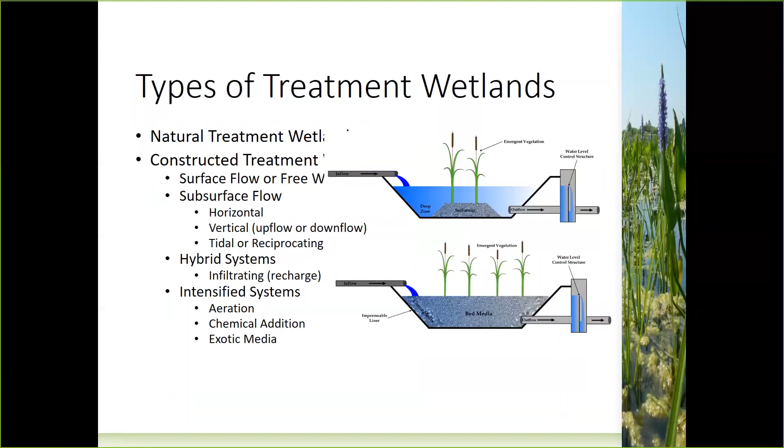There are other chemical supplements that are sometimes added that maybe make up for trace nutrients or elements that are missing that can enhance some of the processes. Various types of media can be used to provide additional adsorption surfaces. So there's a whole range of different types of projects out there.

When we get into Florida in particular and start to look at what's been done, they really fall into these 2 categories. There are a dozen or so natural treatment wetland system projects where existing hardwood wetland communities that maybe have had some kind of hydrologic degradation over time could use supplemental water, have been used as a way to further polish municipal wastewaters or, in some cases, treat stormwater.

Most of the constructed wetland projects in Florida, and this certainly represents the STAs that the South Florida Water Management District has constructed south of the lake, are these constructed surface flow marshes. Within those marshes, which make up most of the types of systems that have been constructed in Florida, we talk about different plant communities. You've heard reference to most of these today.

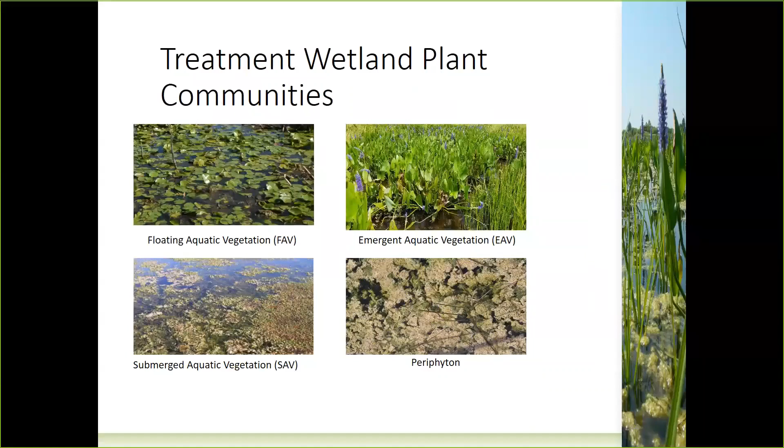Floating aquatic vegetation there in the top left. Emergent aquatic plants, these are the typical marsh plants you see in roadside ditches and retention areas. Submerged aquatic vegetation, we heard Cassandra mention coontail and the naiad and some of the species that were in the mesocosm study. And then the periphyton, which is more of a calcareous algal community that has a real affinity for binding up phosphorus in the water and tying that up in insoluble calcium phosphate compounds.

While most of these pictures of these systems, these nice pretty green things with plants and water, maybe don't look like an engineered system, the reality is that the ones that are designed well and operate the best truly are engineered treatment systems. There's every bit as much science and engineering fundamentals behind their design as there would be in a conventional wastewater treatment plant or a highway or bridge project. So don't let their beauty fool you.

I will not go through this in detail and give you a quiz at the end of the presentation.

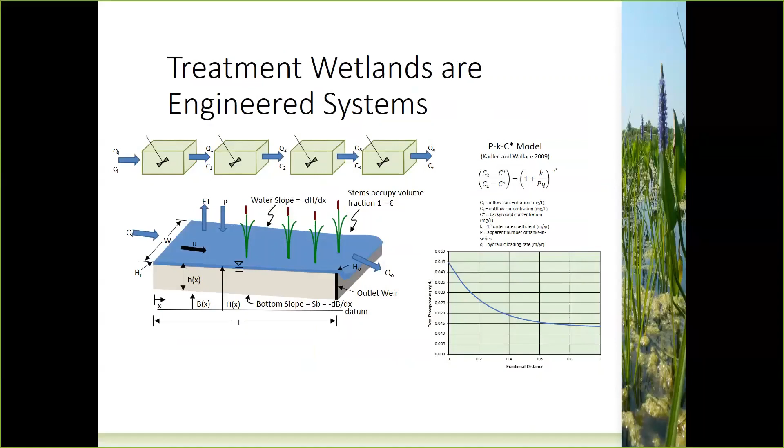With that said, these have been used across the United States and Florida for about the last 40 to 50 years, with some very pioneering work done out of the University of Florida that began in the late 70s, early 80s. Parallel efforts looked at cypress swamps in Florida and constructed or natural marshes in Michigan to accept, in most cases, municipal wastewater effluents, polish those nutrients out, reduce the organic loads, as well as provide other water quality benefits.

There are photolytic reactions driven by solar energy inputs that can break up different types of compounds in the water. There's adsorption to sediment surfaces, new detrital surfaces, biofilms that cover the plant stems and the bottom of the wetland. There's uptake by the vegetation and the bacterial and microbial populations within the wetland. There are biodegradation, transformational type processes as water moves through the wetland.

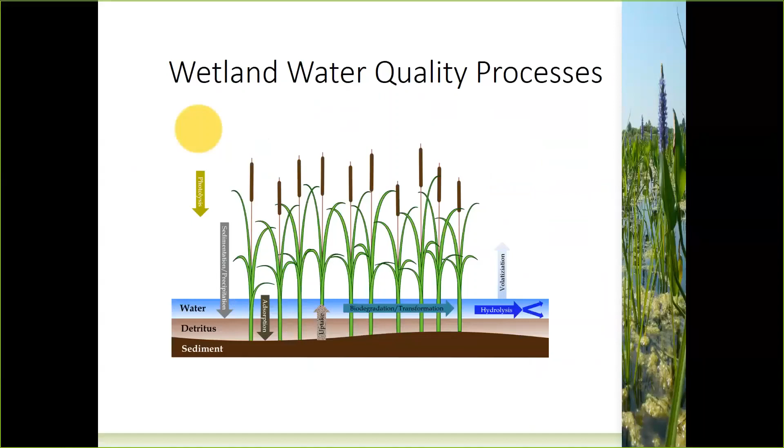Similar with total suspended solids, whether they're algal-based solids or some other form of solids, removal in wetlands is typically good for those when they're well vegetated and operated well. The focus here has been on nitrogen and also on phosphorus in South Florida. We see that nitrogen removal in wetlands can get to 1 milligram per liter, and I'm going to show you 3 projects where those types of levels have been achieved.

The inorganic nitrogen that we've heard quite a bit about already today, the ammonia and the nitrate components, are virtually eliminated in most treatment wetland systems. The natural background concentration for those particular forms of nitrogen is effectively 0. So we can very often, particularly in the summer, when kinetics are maximized at higher water temperatures, get right down to analytical detection limits for the inorganic nitrogen parameters.

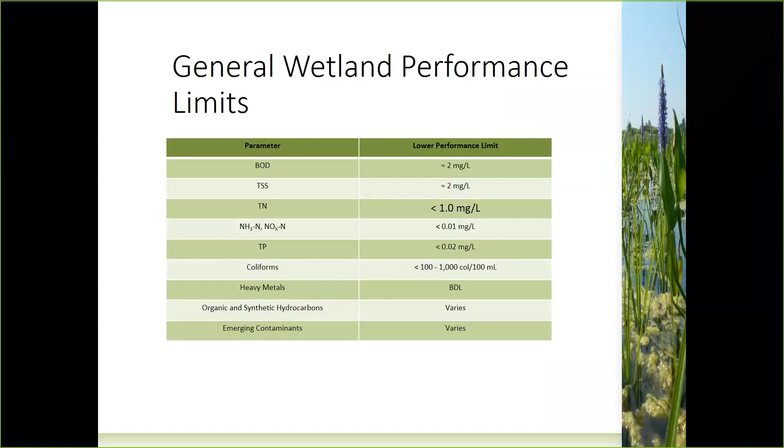Similarly, there are multiple pathways for removal of heavy metals, organic and synthetic hydrocarbons, and a wide variety of emerging contaminants that are starting to break into the news now. We hear about endocrine disrupting chemicals and personal care products and pharmaceuticals, sucralose, those types of things that come out with the waste that leaves our homes and goes through wastewater treatment processes and isn't completely removed in conventional treatment systems. Some of those parameters are very effectively removed in a polishing type wetland system.

There are processes available there that mineralize organic nitrogen to ammonia. There are nitrifying bacteria in there that will take ammonia and convert it to nitrate. And what's really beneficial in wetlands, as you heard Cassandra speak about just before the break, is the denitrification process. Wetlands at their sediment interface are very anaerobic typically. It's a low oxygen environment.

There's dissolved organic carbon that's provided by the vegetation in the system. There are biofilms or slimes that are full of microorganisms that cover all the plant stems and the entire bottom of the wetland. And you put those three things together and you get very good removal of nitrogen through denitrification, leaving the water column and gassing off to the atmosphere.

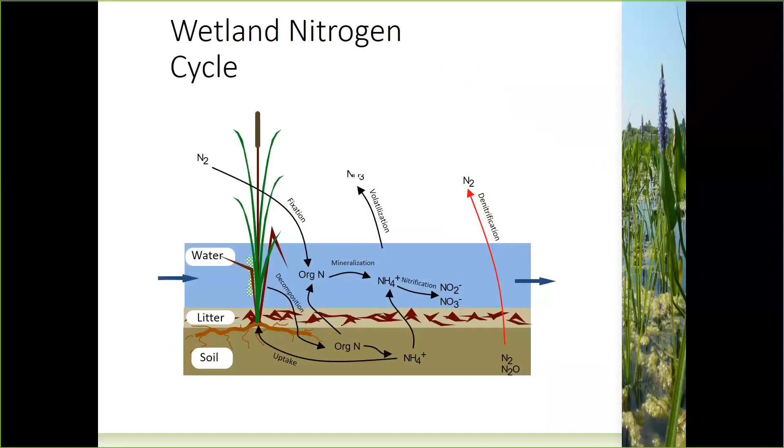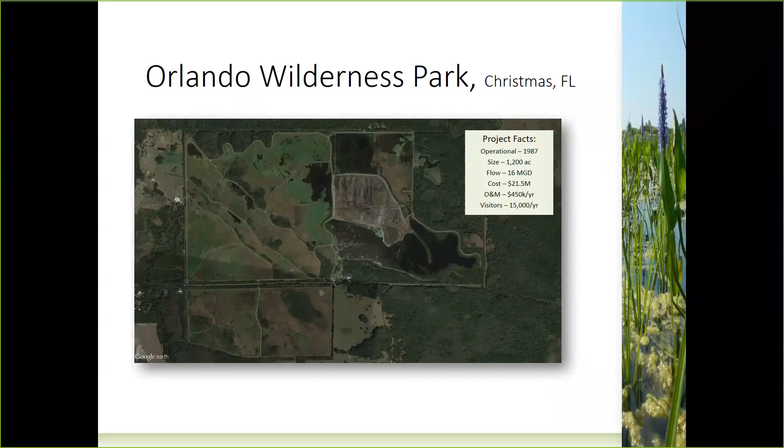Three projects I'm going to highlight now that treat different types of water across the state of Florida, but have all shown a similar ability to get to very low nitrogen levels. First one is Wilderness Park, which is just east of the city of Orlando in a, strangely for Florida, named town of Christmas. It's been in operation since 1987, and it treats advanced wastewater from the city of Orlando's Iron Bridge Water Reclamation Facility. It treats a flow of about 16 million gallons a day. It's 1,200 acres in size.

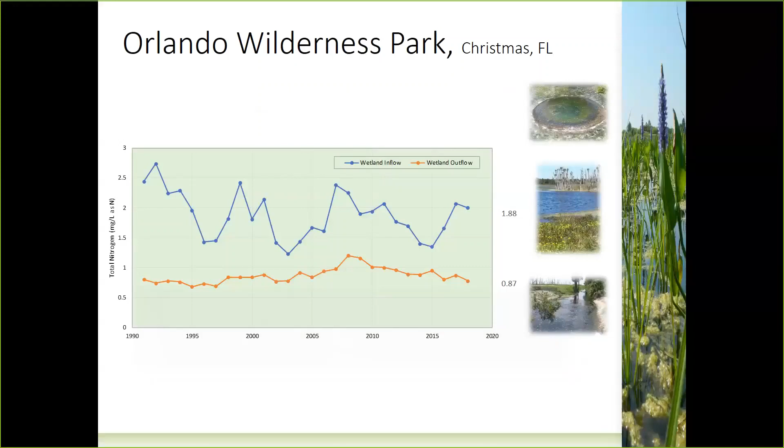So we see that over this long operational history, the inflow nitrogen for this facility has averaged 1.88 milligrams per liter, and the outflow has been well under 1 at 0.87. Again, this is one that treats all municipal advanced treated wastewater. This next project is located in Gainesville. It's called the Sweetwater Wetlands Park.

This one treats combined flows of treated municipal wastewater, reclaimed water, as well as watershed runoff from a several thousand acre urban watershed. So both those sources of water commingle and come into this project and are treated.

Any Gator fans that might be sitting in the audience can look very closely at this picture and you might see something recognizable there. I'll point it out in great detail.

But here's the operational data. This project's been up and running since the middle of 2015. So it's a relatively new project compared to Orlando, but the performance for nitrogen has been relatively similar. The inflow concentrations have been a little higher coming in here. This wastewater from this facility isn't treated to as high a level as the Orlando system. There's a little bit more nitrate coming in with this system.

But as you see, because you've got that denitrification process, it works so well in wetlands, we don't have any problem getting this system down to about that 1 milligram per liter mark for total nitrogen leaving and going to the receiving system.

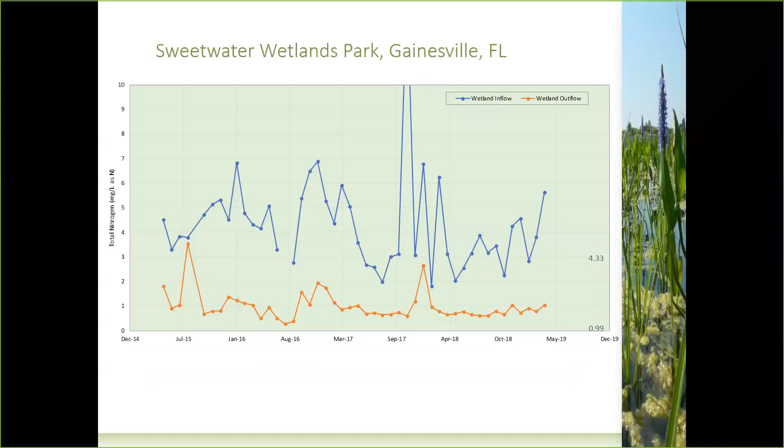The last project is one that's a little closer to where we are now. This is Freedom Park in Naples, which treats purely runoff. This is not a reclaimed water project or a reclaimed and stormwater combined project. This one's all watershed runoff. It's capturing the water from about a 3,000 acre watershed and treats about 200 million gallons per year of flow and reduces those concentrations in that nitrogen by about 41%.

We look at their operational data here. You see that the nitrogen concentrations here are a lot more similar to what we see in the Caloosahatchee River, the C-43 Canal, kind of averaging there around 1.5 milligrams per liter, which is kind of in the range of what the inflow concentrations were like in the Mesocosm project that Cassandra spoke about.

And we see that this treatment wetland system is similarly capable of getting those nitrogen concentrations down below a milligram per liter. So again, this is because all the inorganic nitrogen basically is being removed, and those little bits of available organic nitrogen that are being produced in the system, as Cassandra showed, are also being consumed and reduced.

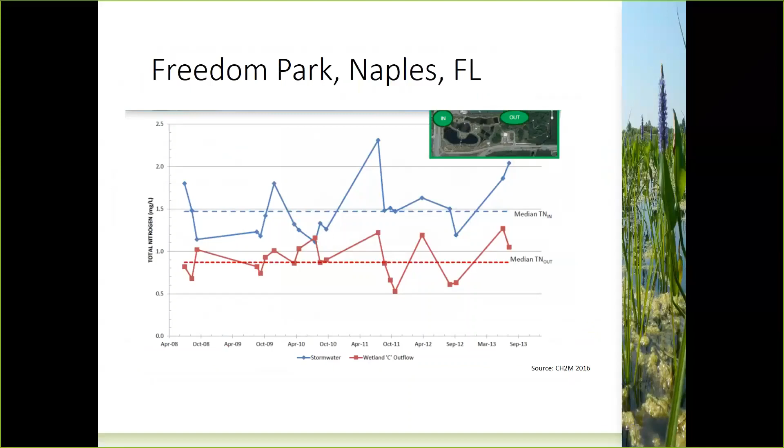As part of some previous projects for the water management district, we looked at performance from a range of systems across the state, evaluated those data based on vegetation type and soil type and started to see if there were any differences there. And what was interesting for nitrogen, and this was borne out again in the mesocosm project that we just heard about, was that there wasn't a very clear difference in performance across vegetation type for total nitrogen.

The same is not true for phosphorus. The submerged aquatic plant periphyton community showed a much better removal efficiency for phosphorus as a function of vegetation type. So there's some differences there depending on what parameters you're really interested in improving.

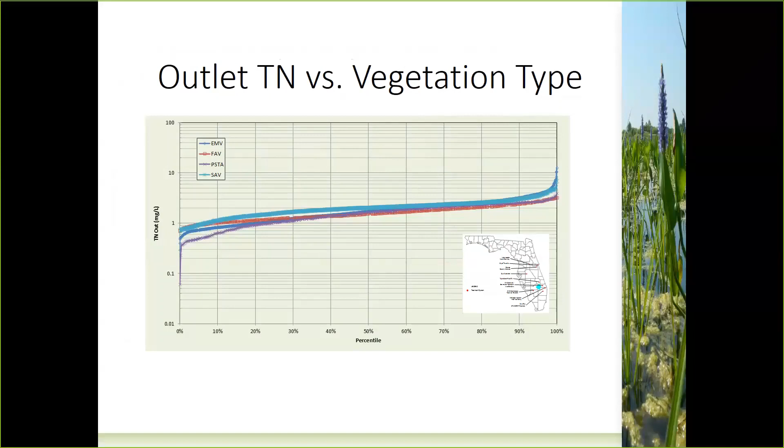However, when we look at it based on sediment type, we found some very interesting differences relative to total nitrogen removal. We grouped these based on the natural substrates that were there for those treatment wetland systems, whether they were clay, peaty organic soils, sand, or lime rock. And what we found was that the sandy mineral soils consistently produced the lowest nitrogen concentrations.

That is why this kind of spiraled into the work that Cassandra talked about, why the soils that were put into those mesocosm tanks were sandy soils from that site, and why we went to the next step of looking at any labile nutrients that were there and doing the acid and peroxide rinses to liberate those and be able to really compare that difference. But kind of across the board, and this is consistent with the Freedom Park project, the Orlando project, and to some degree the Sweetwater project, they're all constructed on mineral soils.

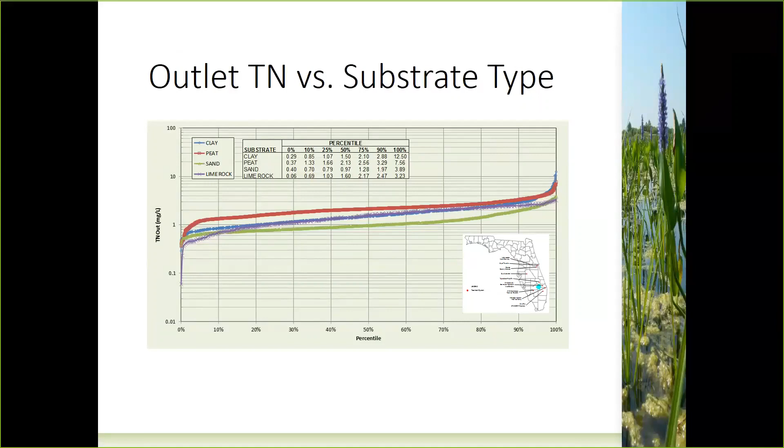So finally, some keys to maximizing wetland performance. Again, this kind of goes back to this concept that you've got this nice pretty green blob with plants growing in it, and wow, it looks great. They can be designed well and they can be designed poorly. So it's very important to understand the system goals.

There are differences in how you approach a design and how you approach operation, whether you're concerned with load reduction or concentration minimization. There are big differences between the STAs that are south of Lake Okeechobee that are trying to minimize the outflow phosphorus concentration versus the couple of STAs that have been constructed on tributary inflows to Lake Okeechobee, such as the Taylor Creek STA, that is focused on load reduction. They operate at different efficiencies and with somewhat different purposes. So it's important to understand at the outset of a project what's the goal, so that you can approach the design in the right way.

As we just saw on the previous slide, selecting the right site. The soils matter. If you want to absolutely minimize nitrogen concentrations, probably don't go build an STA or another type of treatment wetland system on a peaty organic field. Choose a better place for it.

Maximizing hydraulic efficiency. This is that whole green blob thing. You can have something that looks like it's unorganized and maybe just this green space, but if you really want to maximize the water quality performance benefits out of that area, the grading design is important. The location of inlet and outlet structures, the internal flow redistribution is important. How it's analyzed, how the cell geometry is laid, and how that relates to velocity and depth control and a whole variety of other issues.

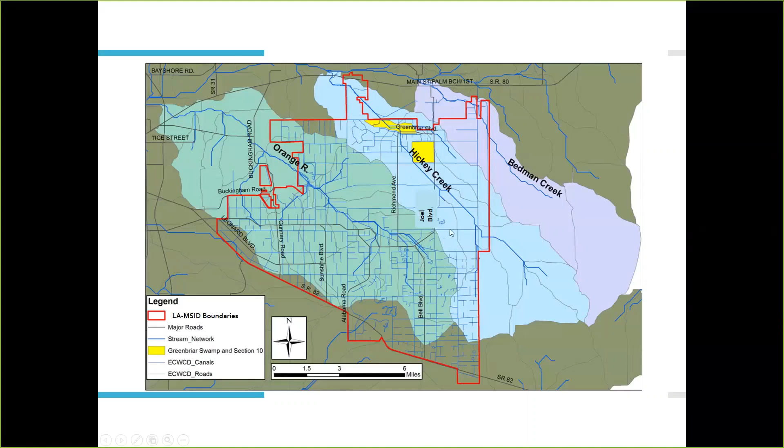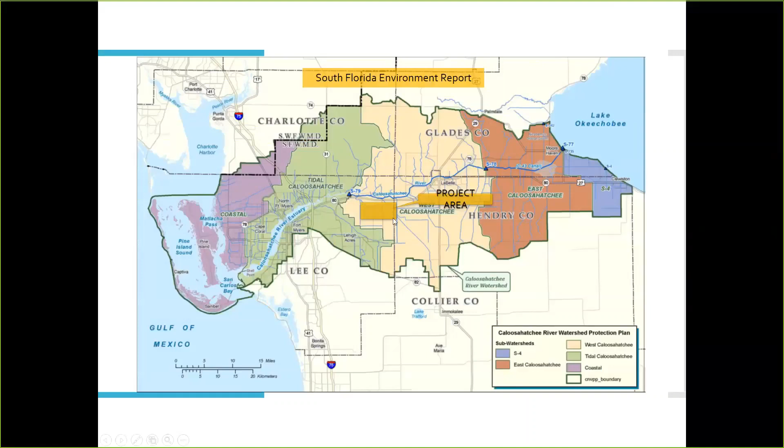And we've seen this picture today where the project area is. You can see our project area that we're going to look at today is about in the center in that area. This is our district. It's 110 square miles. It has 311 miles of canals, 20 lakes, culvert crossings. We have quite a few weather stations, 31 weather stations. We have 109 water control structures, and 64 of them are automated, so we can control where our water goes pretty good.

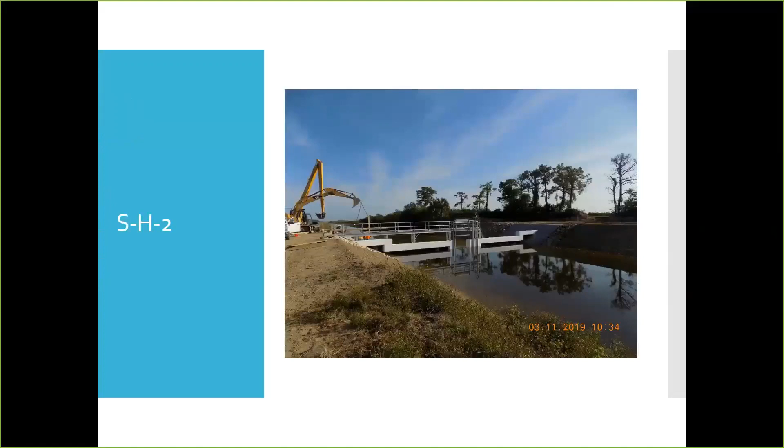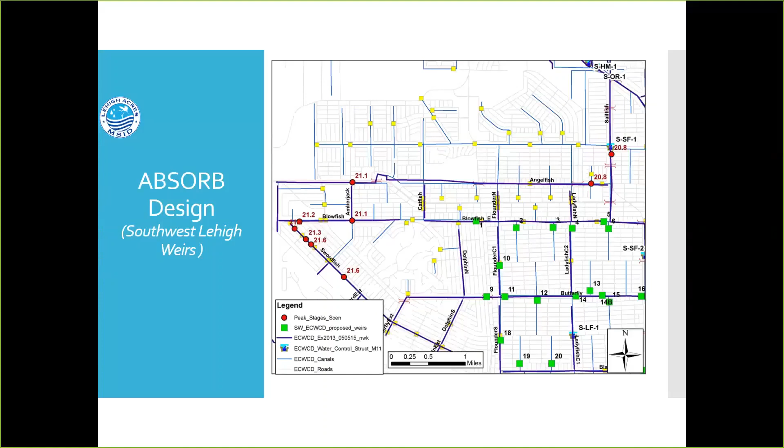The Absorb project we finished in 2018, that added 25 water control structures in southwest Lehigh Acres, being able to raise water levels, hold back, isolate water from the Caloosahatchee up to 3 or 4 feet in a 10 square mile area. There's some pictures of construction.

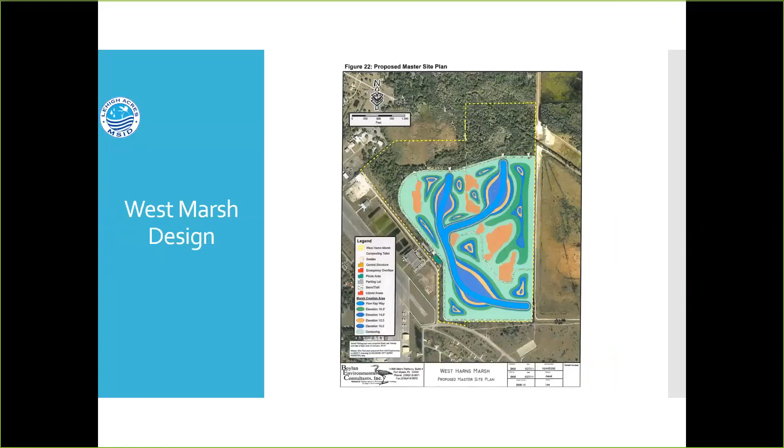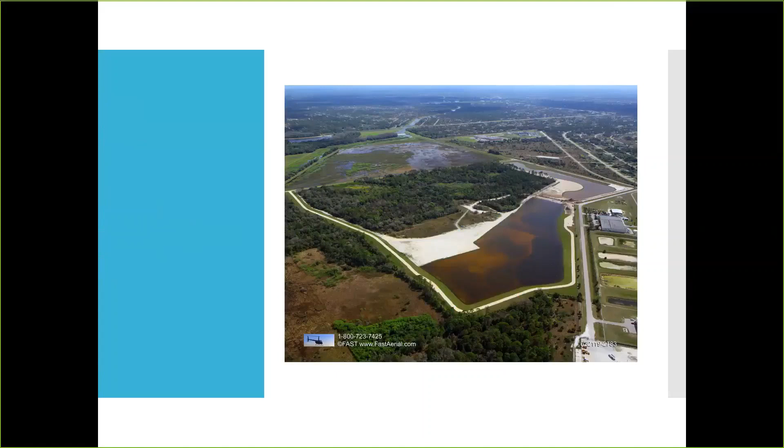This is the conceptual plan that was drawn by Boylan Environmental Consultants, and we are about halfway through the excavation of this project. So there'll be some deep lakes. We're restoring. We're leaving the wetlands actually in place and creating filter marshes throughout the rest of the project. All of this dirt is being moved down to State Road 82 widening project.

Crest, I just mentioned before that we moved a structure 1,000 feet south. The structure was moved down here by this Crest project, this little square right here. That's a 205 acre parcel that we have purchased recently. That's a picture from a drone. This is the conceptual plan right now from our engineers.

We'll bring water in off Hendry Canal to deep lake storage through a filter marsh, and then into deep lake storage again, and it'll outfall back into the Hendry Canal. That will be a treatment process that will be going on all summer long until we get a heavy event.

We'll be pulling water in a heavy event out of Dog Canal, which is a half mile away from our Hendry Canal, filling up our storage and then conveying water from Dog Canal to Hendry Canal to help some flooding issues that we also have in big events.

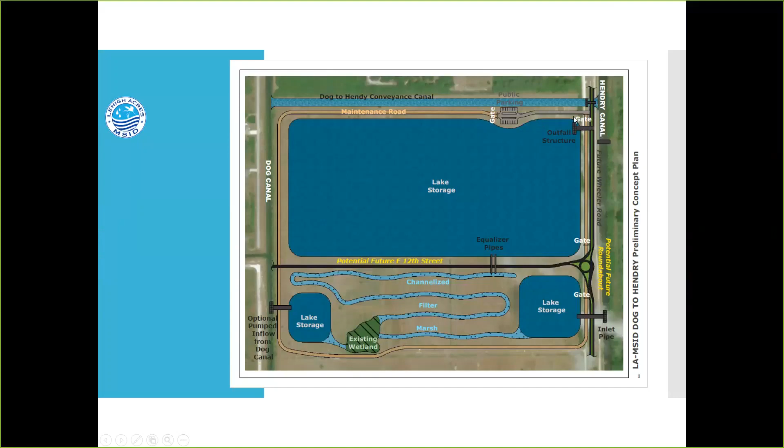Hendry Canal widening, we're widening 3.5 miles of our canal from 80 feet wide to approximately 200 feet wide. All of that dirt is being taken down to the State Road 82 widening project. So DOT basically has built the reservoir and are building this at no cost to us. They're discharging their water from State Road 82 into our system. We worked out an agreement on that, so that worked out well for everybody.

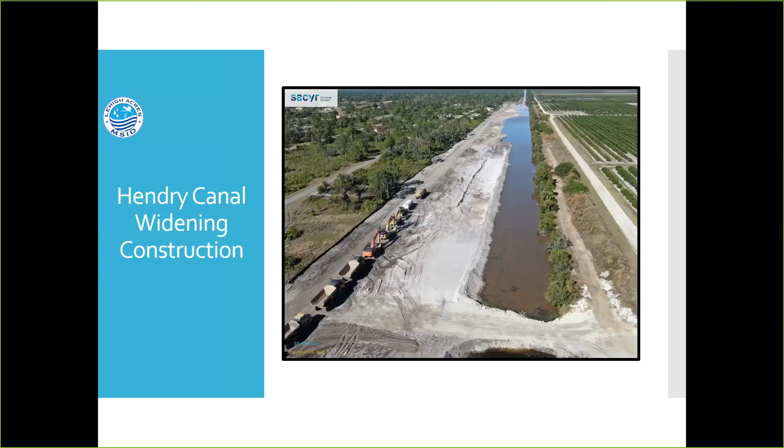Both sides save money. This is just an early picture of the widening process. Between the two projects, they're taking about 100,000 dump truck loads from our projects to State Road 82 widening. That brings us to why we're really here: options for the water quality treatment on the C43 reservoir.

We have some options here. We have the GS10 project that I'll get into, the Carlos Waterway that we own, Dog Canal and Bedman Creek are all treatment options that could be used by the Water Management District. And of course, the benefits that we've been talking about with all the other projects: reduces freshwater imbalance, reduces nutrient loading. That also gives public-owned lands some storage, some ability for recreation.

The GS10, this is another project that we worked with Lee County. They purchased an entire section of land within our district. We nominated the parcel to the 2020 program, and then over a couple of years, things were worked out. And just a month or two ago, Lee County did purchase the project, and out of the 627 acres, about 560 we're going to use for a water quality water storage project.

You get the same benefits basically here. You get the extra storage, the water quality, flood control. You get wildlife and recreational enhancements as well. This is what our staff drew, with numbers that we had back a couple of years ago, and I think they're probably still pretty much the same.

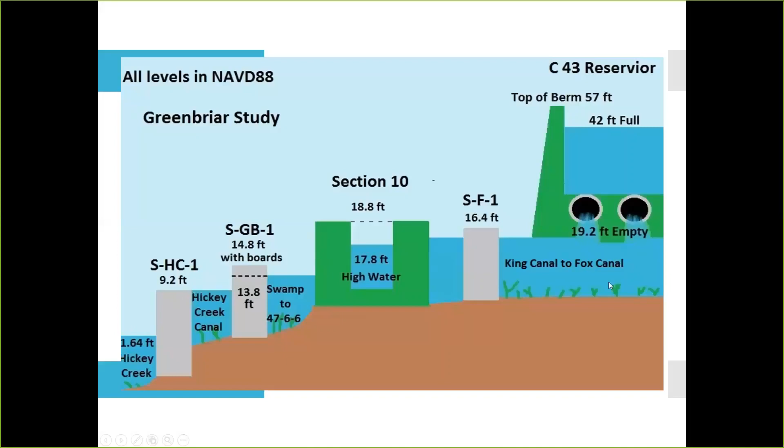This is a map generally of where things are located. You've got the C43 reservoir. There is a Townsend Canal that's been mentioned today. 100 feet west of the Townsend is our Hendry Canal, so we're that close to this system. Water, pretty much like I said, could gravity flow either across King Canal or Fox Canal to section 10.

We would have that water quality water storage project here. It would then filter up through our Greenbriar Preserve and discharge out of the Greenbriar Preserve into the headwaters of Hickey's Creek, or down our canal swale over to Hickey's Creek Canal and back out.

This project has a lot of merit, and I know it's going to need a lot more study to make sure that it's going to work well for everybody. But the beauty of it is we're going to be using this system all summer long in the rainy season, and in the dry season when the C43 needs it, we won't be using it. So they could basically take control of that system.

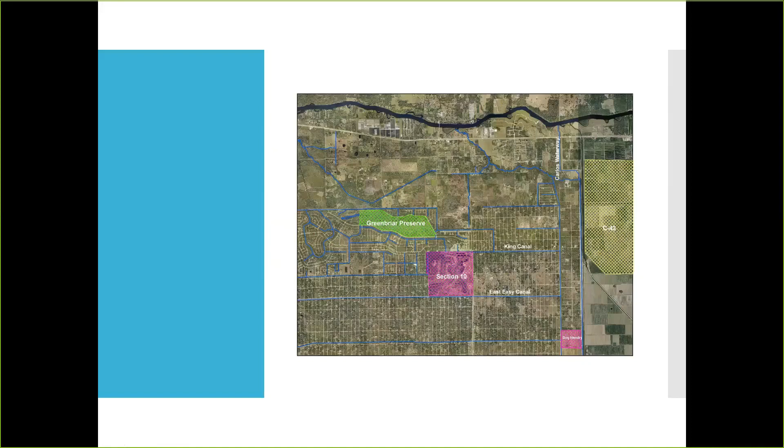This is an aerial of section 10. It's an old mining pit. They used most of this. This is mostly a lime rock pit that they used to build the roads in Lehigh Acres many years ago. So it's partially excavated, so it'll make it a little easier for us to manage.

This is also going to have a public park area. Because they're going to manage the recreational portion, there should be beaches and fishing and all kinds of recreation there as well.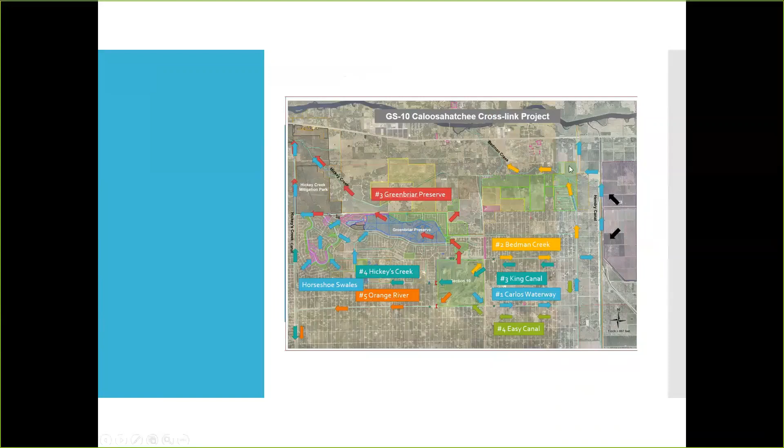Now, in between these structures, which are sheet pile, sharp crested weir structures, right now it's just a 350-foot wide grassy swale, but that could be modified to make those into some kind of a filter marsh system that would provide more water quality.

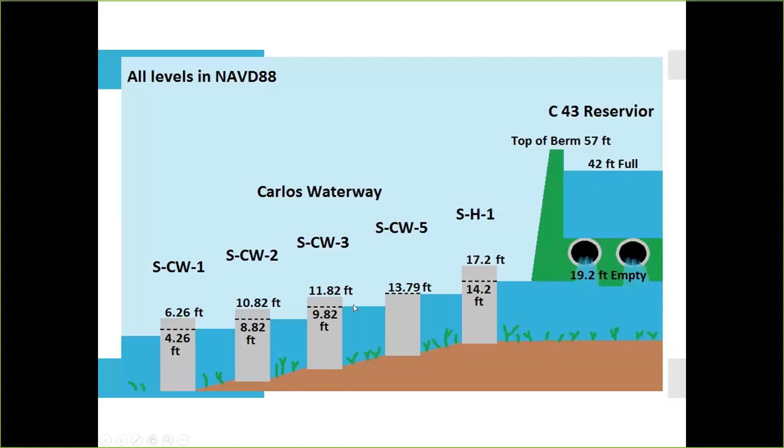And again, we're not using that system. We stopped discharging into that system probably in September up to October. From that point all the way up to the following June, we're not using the system. So due to its location and the operation schedule of the Carlos waterway, I think it should be studied and be a very interesting option for some of the water from the reservoir.

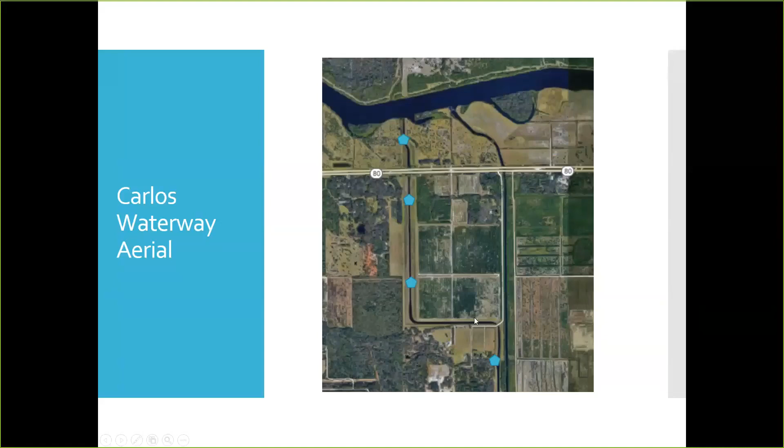It's certainly not going to solve the whole issue. But between the two projects, we've quoted Roger Kopp, who a lot of us know in the room. He thought that between the two projects, we could potentially handle half of the discharge from C43. That certainly will have to come out in a study. We haven't got any hard data on that.

Again, my name is David Lindsay, and that finishes my presentation. And I guess I'll sit down and we'll answer some of your questions as you submit them.

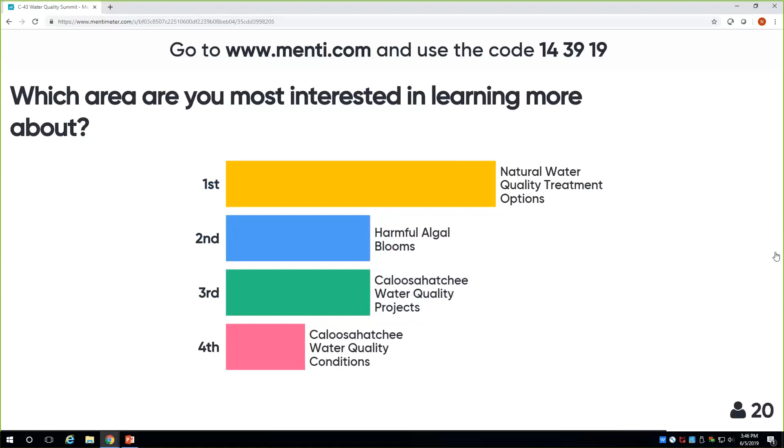All right. Looks like natural water quality treatment options was the favorite out of those choices. Next one, which treatment option do you think is most important to pursue? So this is a slight variation. We have new natural water quality treatments and several others, but they just disappeared, so you'll see them all on your screen. Go ahead and put the one that you think is the most important to pursue.

All right, 28 responses. Great. Climbing. So we're going to continue to let those roll in, and we'll make sure to capture and download all of these and provide these. All right, now it's stuck.

Then open-ended question. Submit what your ideas are about C43 reservoir water quality treatment after hearing everything you've heard today. Or maybe something you haven't heard today that you feel should be considered. If you could just go ahead and enter your idea now, we'd like to collect up all of your ideas. And don't be afraid to put something down that you heard that you liked so that you can make sure that was considered, if you heard something today that you want to continue to be explored.